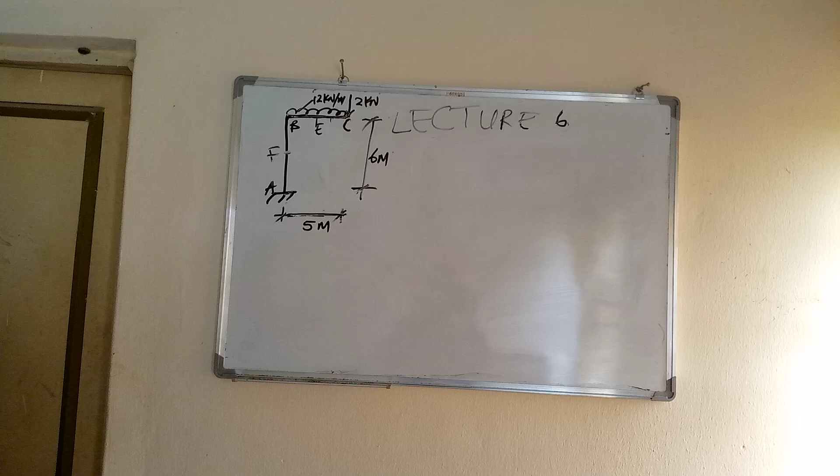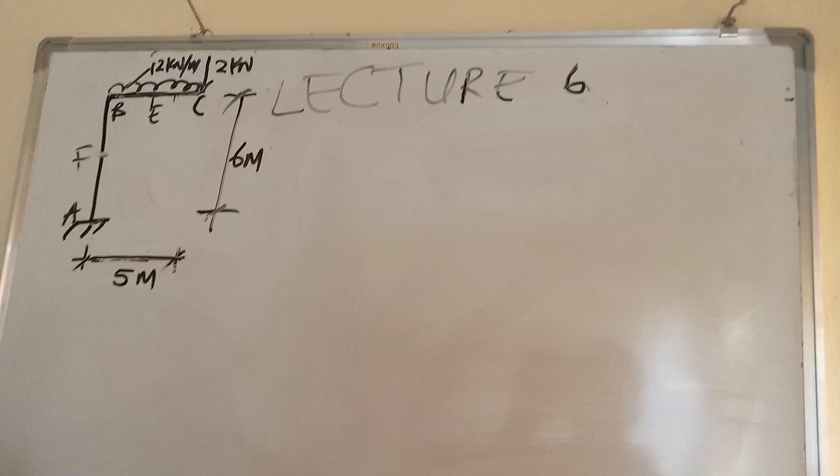This episode deals with the same type of frame, but differently loaded. This frame contains a point load at point C of 2 kilonewton and a uniformly distributed load of 12 kilonewton per meter together. I want to deal with it to show how it is done.

The reaction is the totality of the load. The UDL totality will be 12 times 5. Reaction at A is the totality, 12 times 5, then plus 2, which is equal to 62 kilonewtons. That's the reaction: 12 times 5 is 60, plus 2, 62 kilonewtons at A.

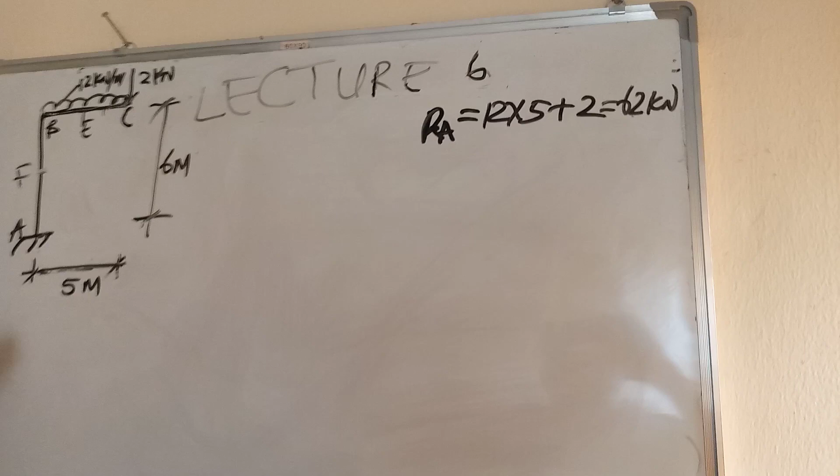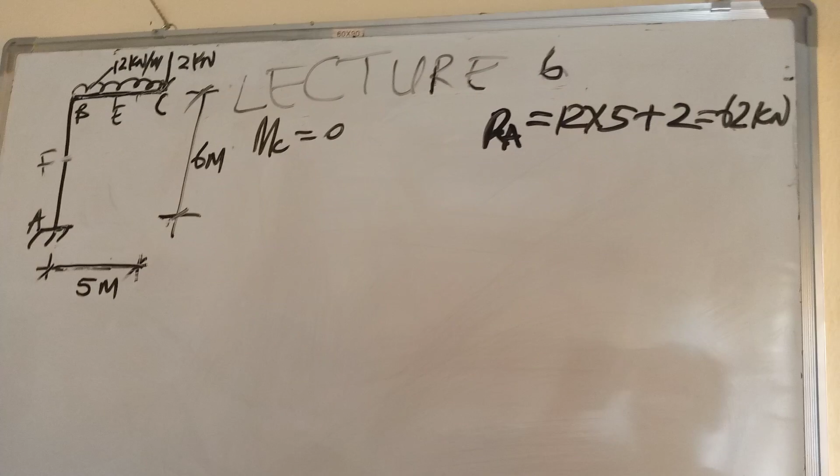Now, to get the bending moment, let's say moment at C is equal to 0. You must have known, if you are following this lecture, why moment at C is 0 - because there's no distance of C from itself, and there's no support for that matter. Then we now move.

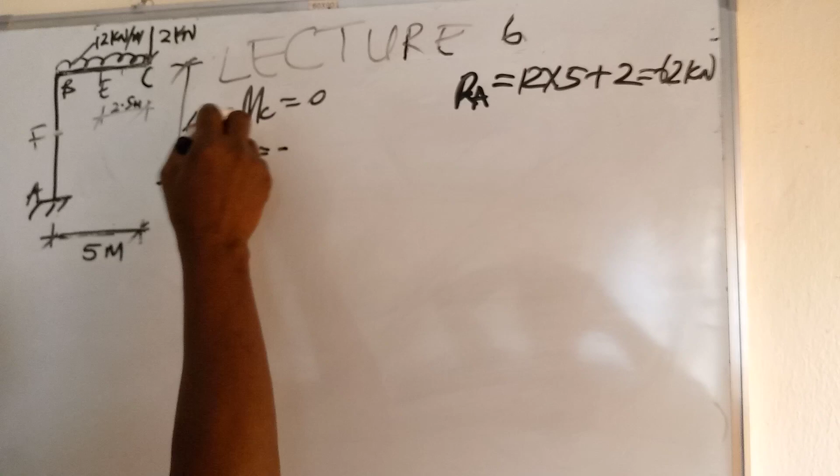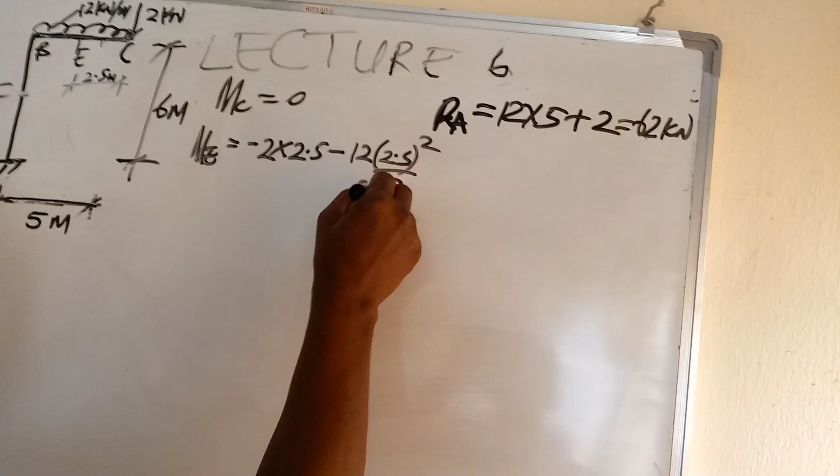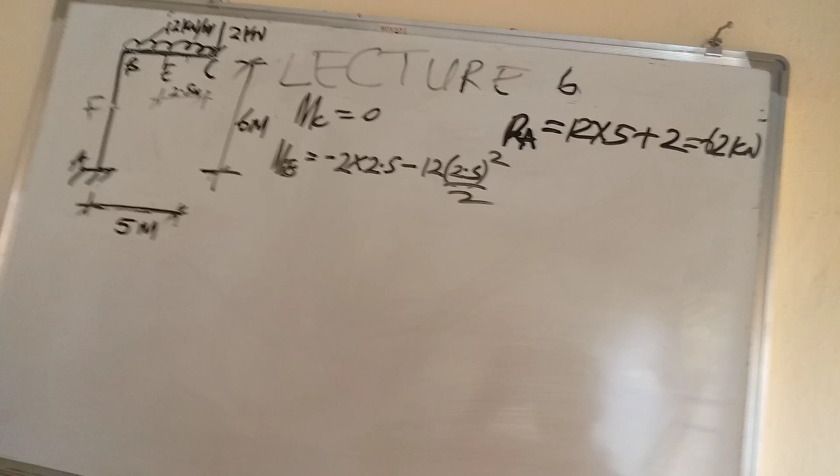At point E, which is half of the distance, 2.5 meters, the M at E is equal to minus 2 times the distance 2.5, that's the perpendicular distance, then minus 12 times 2.5 squared over 2, that's from E to C. E to C: 2.5 times 12 as a bunch of load, then times half of the distance, because we're taking moment at E. That gives this: equal to minus 5 minus 6 times 2.5 squared.

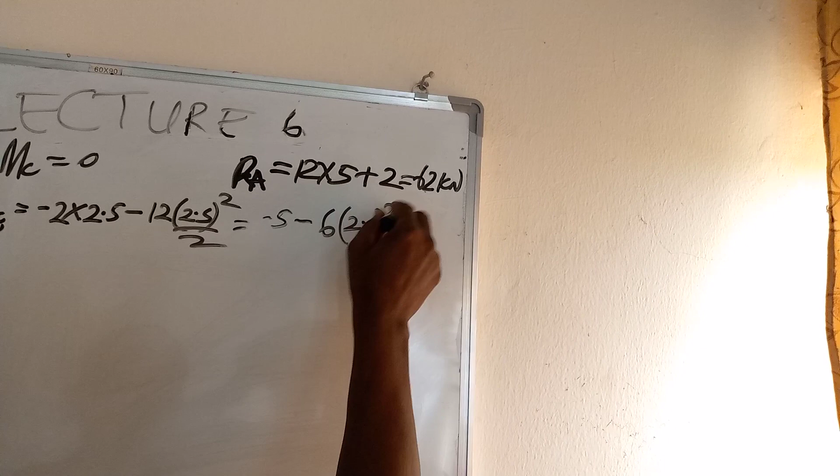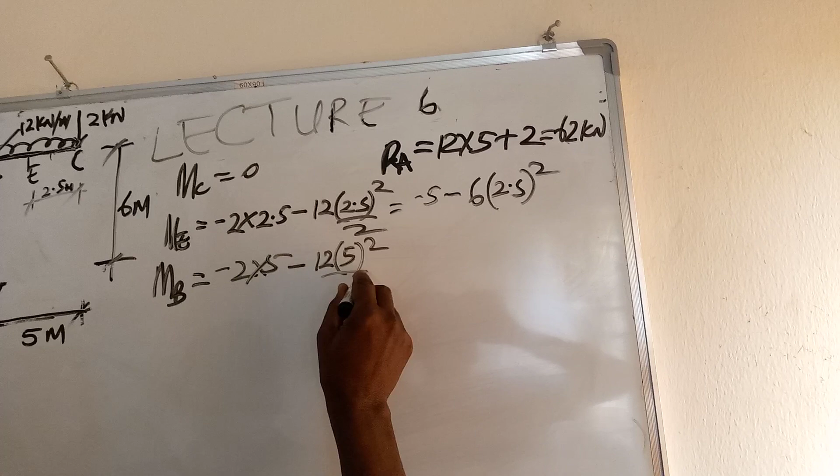At point B, M at B, moment at B, is equal to minus 2 times 5 minus 12 times 5 squared over 2, which is equal to: minus 2 times 5 is minus 10, minus 10, then minus 25 times 6, giving minus 197.5 kilonewton meter. That's the moment at B.

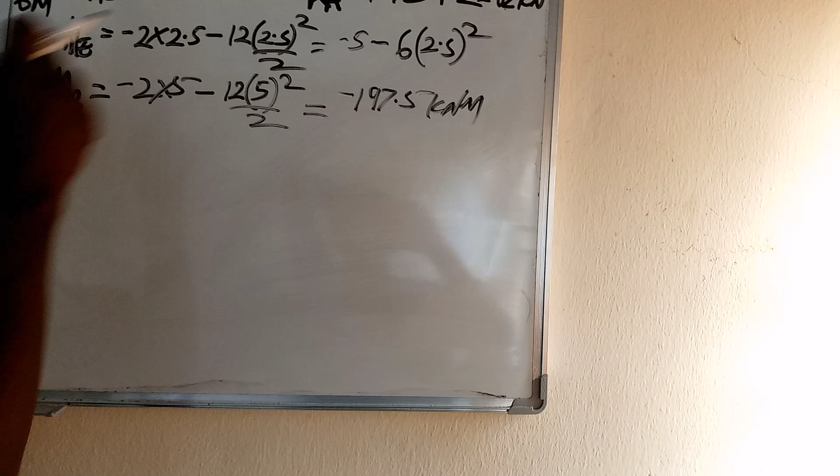Each of them created a moment. The first two created a moment by multiplying the distance of 5 to create a moment, force times perpendicular distance. The force, 12 kilonewton, multiplied by 5 gives the bunch of the load, the complete total load, then half of 5. That's why you have 12 times 5 over 2, so 12 times 5 squared over 2.

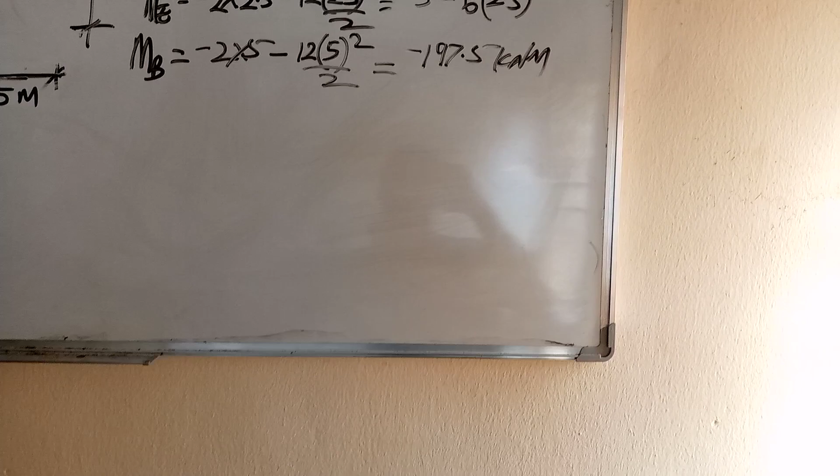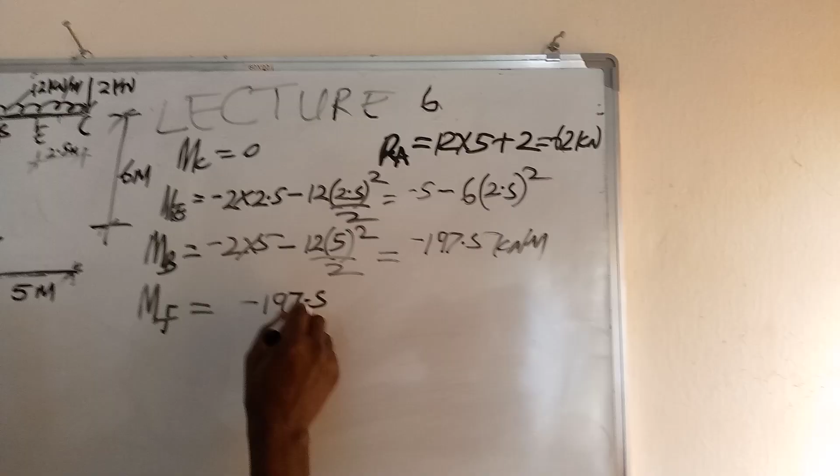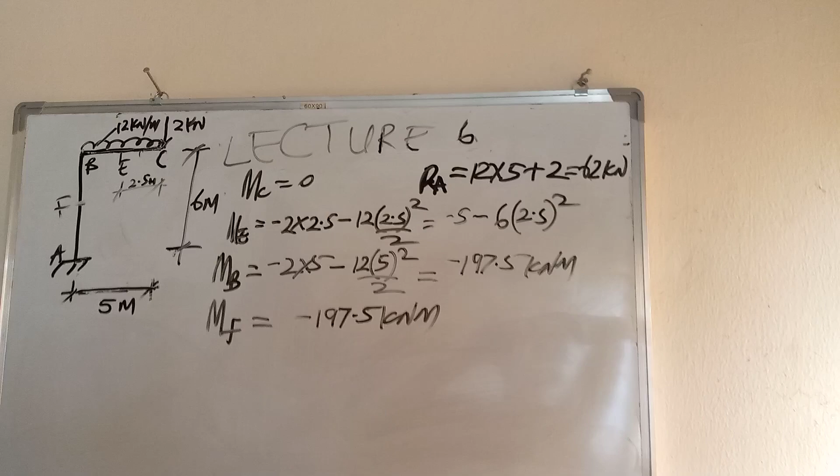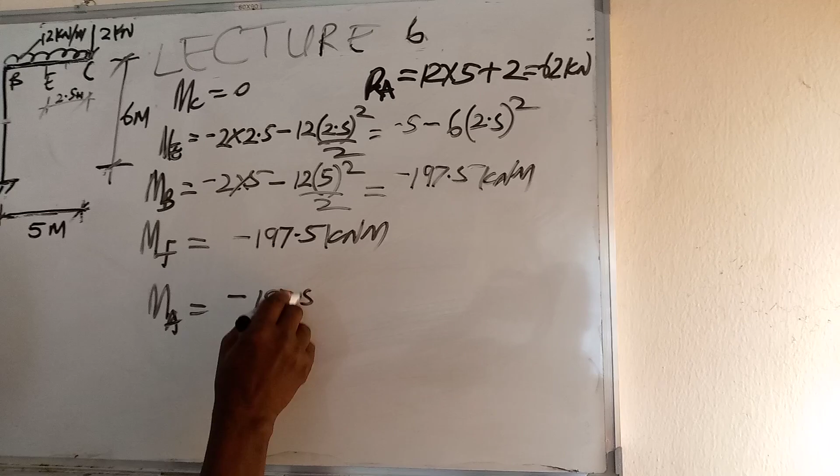So at M at F, the moment is constant. If you've been following the other episode, the moment is constant. It becomes still minus 197.5 kilonewton meter, because the length BF is not perpendicular to any of the loads - it is parallel to the line of action of the loads, so the moment is constant. Now M at A is still equal to minus 197.5 kilonewton meter.

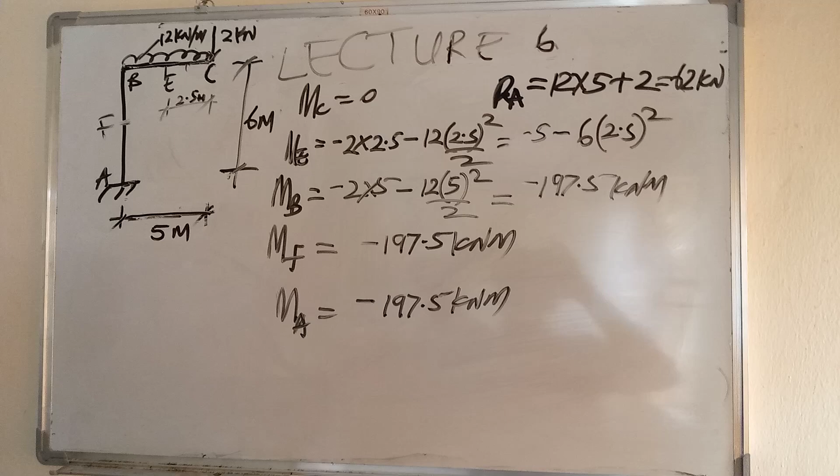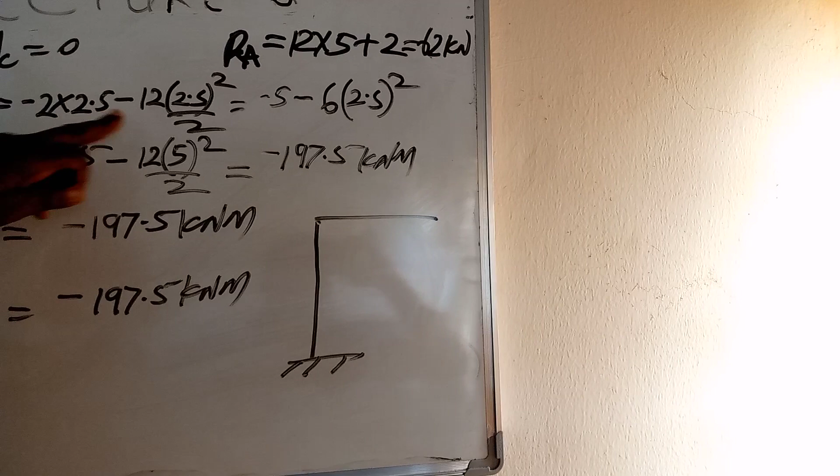That is the bending moment. We will now draw the bending moment diagram. At point C, moment is 0. You see the equation of moment at point E up to B is quadratic, and as such the graph will be a curve - it's a quadratic function.

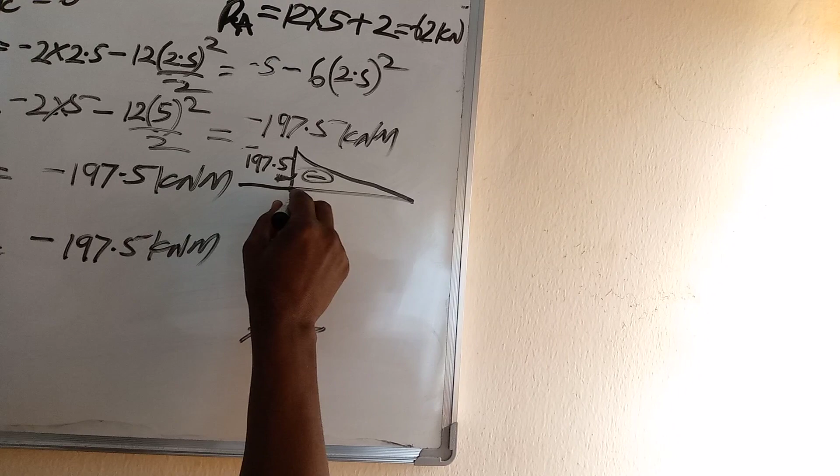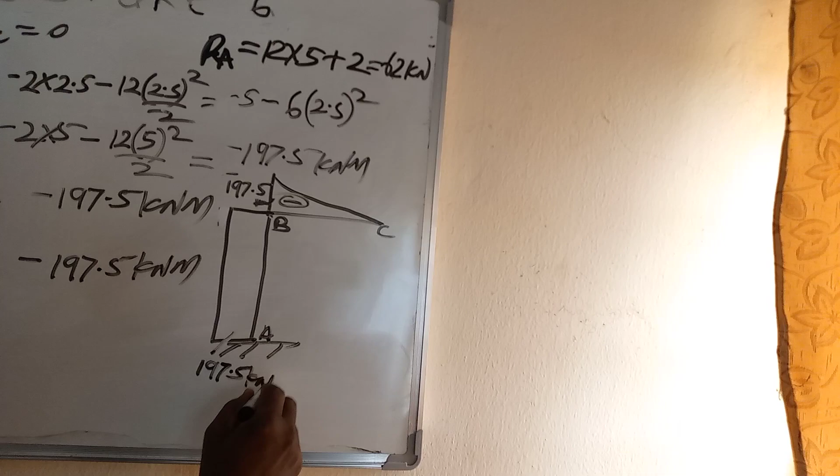Negative, that's 197.5 kilonewton meter, so that's at point B. At point B, this C. So now in BA, the line BA, it was the same thing, so that's why it became a rectangle of equal width, that width is 197.5 kilonewton meter, negative. This is the bending moment diagram for this frame.

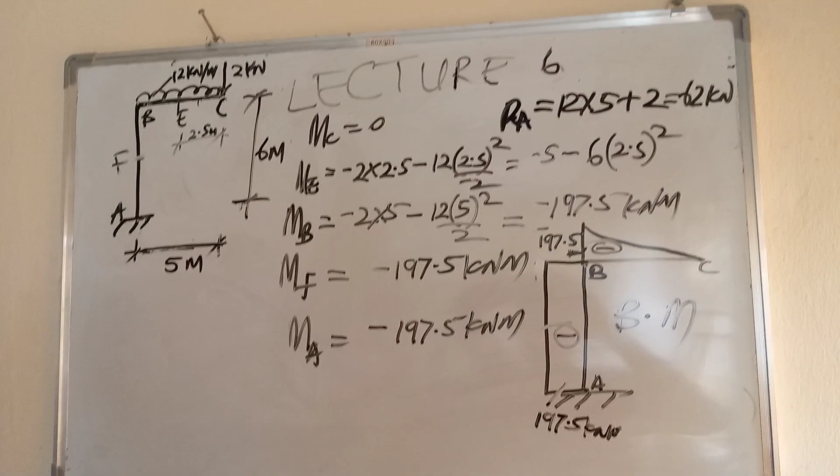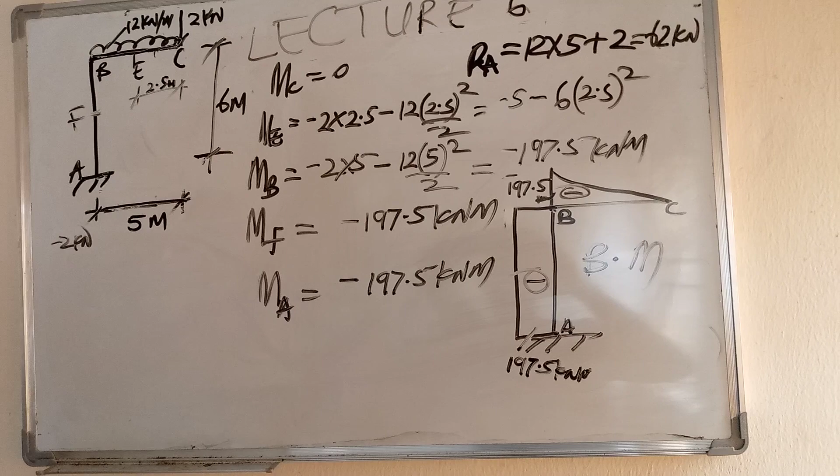Shear force at C is minus 2 kilonewton. That's shear force at C. The shear force at B is minus 2 kilonewton minus 12 times 5, which is equal to minus 62 kilonewton at B.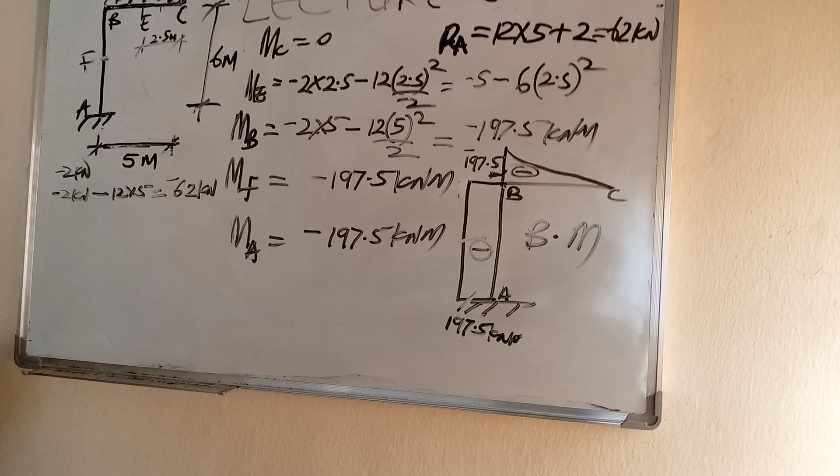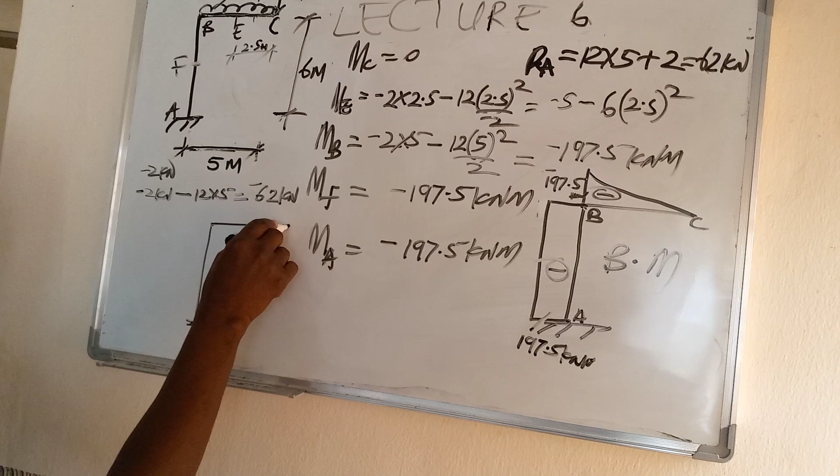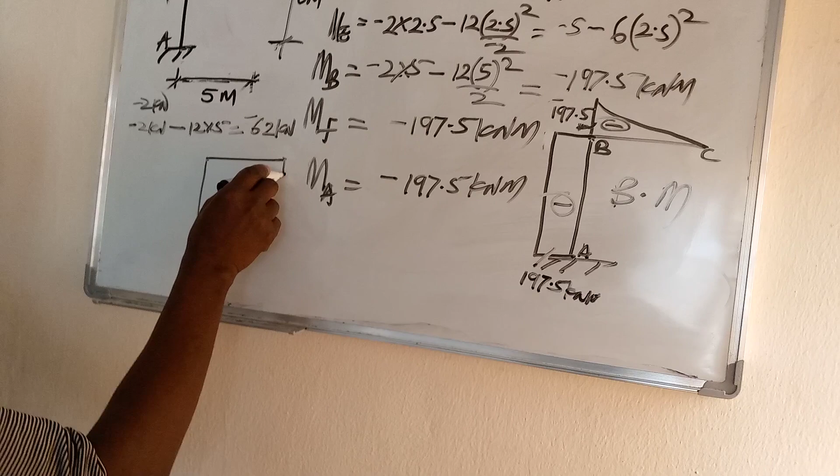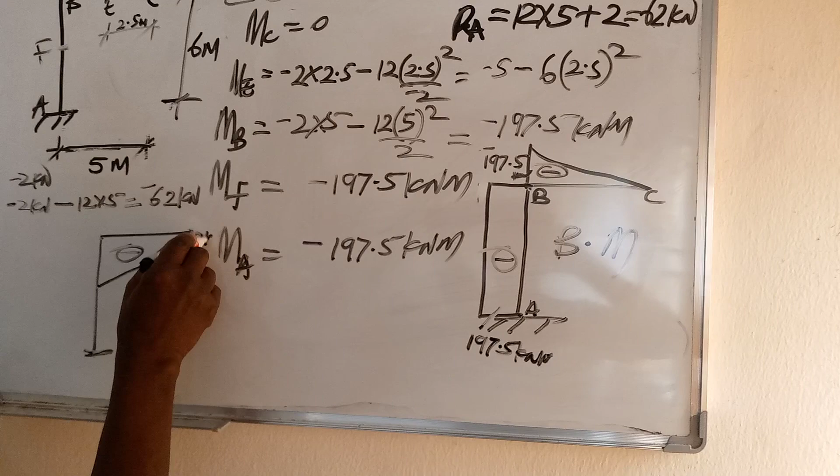It was varying. At C it is minus 2. So the shear force diagram: minus 2. It increases, starts increasing till - this is 2, this is 62.

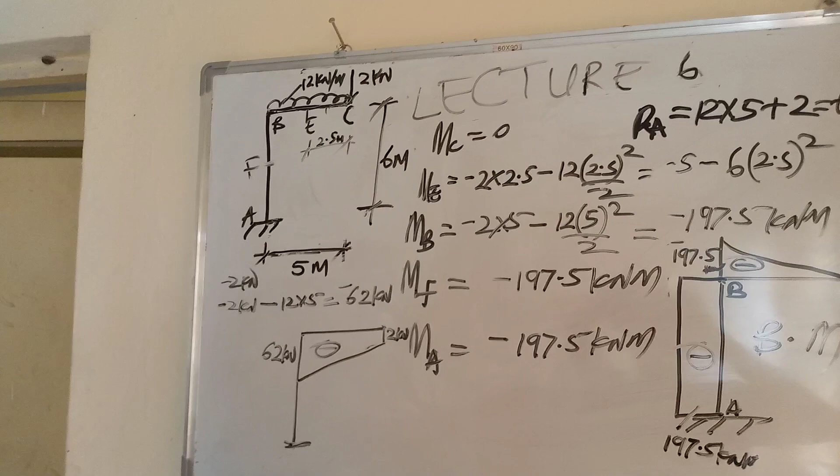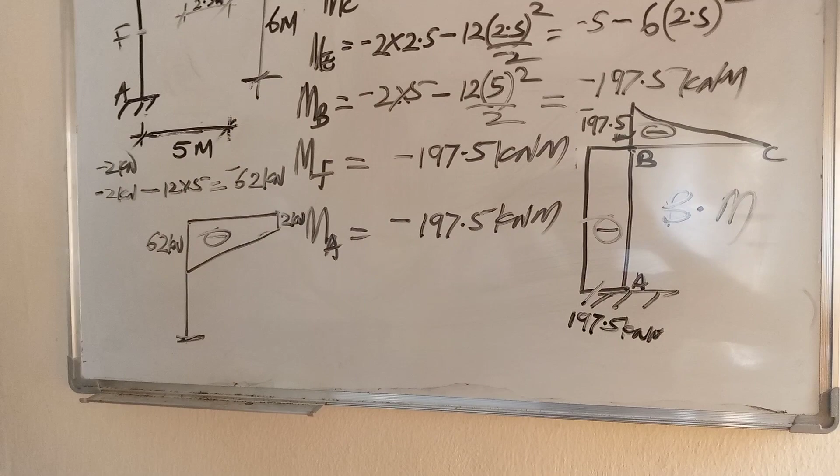There is no shear force in BA, but there's one normal force there. The normal force along BA is 12 times 5 plus 2, that is 62. Shear force diagram, normal force diagram: 62, and 62 kilonewton.

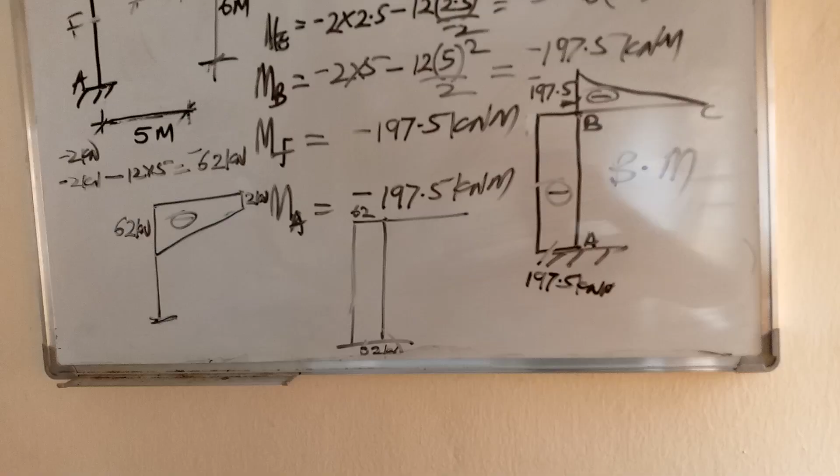So that's that. Both shear force, normal force, and bending moment have been calculated. The beam has been analyzed and the diagram drawn. Thank you very much.